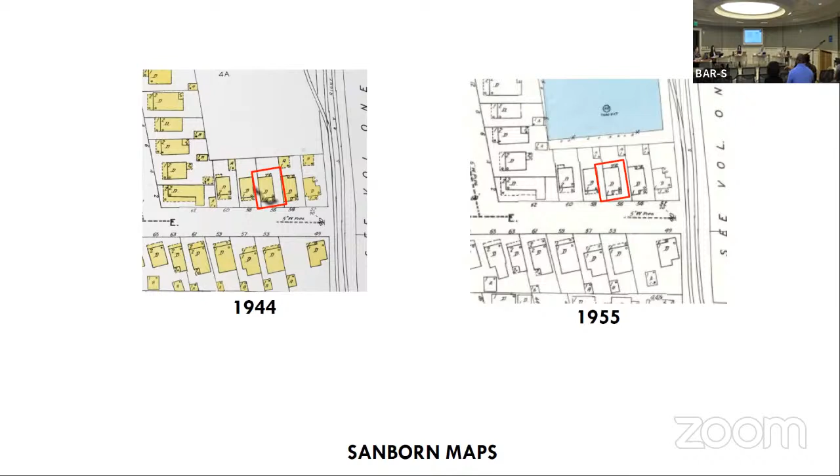Good afternoon, I'm LaShawn Key with Key Designs LLC. Going to present, we're requesting demo of 56 Congress Street. As you mentioned, it was built in the early 1920s.

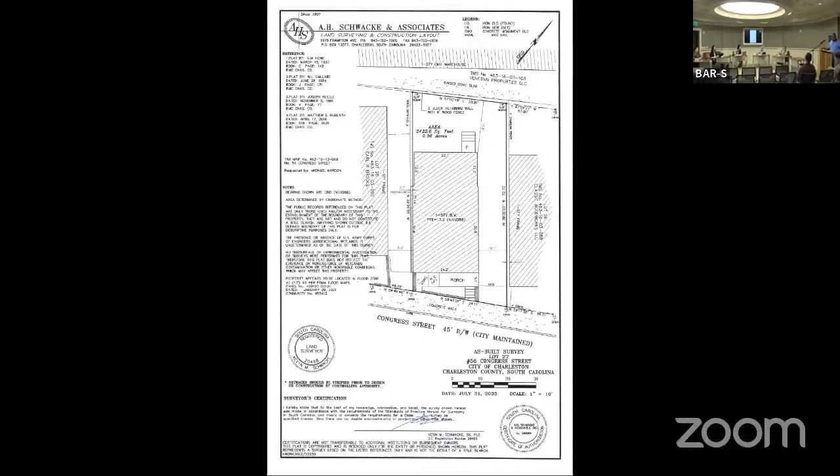This is the site survey, and I'm sorry, demolition drawing. Please go to the next slide. This is the survey for the property, and one thing I want to note that I failed to mention this morning is that the property actually sits across the property line by about 9 inches or so. That was also pointed out to us by the owner of the next door property, Ms. Alvina, who's here to speak about that later. Next slide, please.

We already seen the Sanborn maps. Next slide. This is an exterior shot from Congress Street, and a couple of things I'm going to talk about specifically to the historic demo purview is the fact that from this view, there's really nothing historic about the house that is still there. The metal roof that's in the Google images was taken off approximately 8 to 10 years ago. The wood siding is no longer there. It's brick veneer, and there's just really nothing there. There's also no survey card for this property, so we feel there's really not a good argument for it to remain here. There's nothing historical to tie it, to keep it.

Could be your next slide, please. There's also, this is the west facade, just brick. Next slide. And again, this is the rear property. A rear addition was put on, I believe approximately about 20 or so years ago. The rear is just really poor construction, actually not structurally sound. We do have a structural engineer's report detailing that.

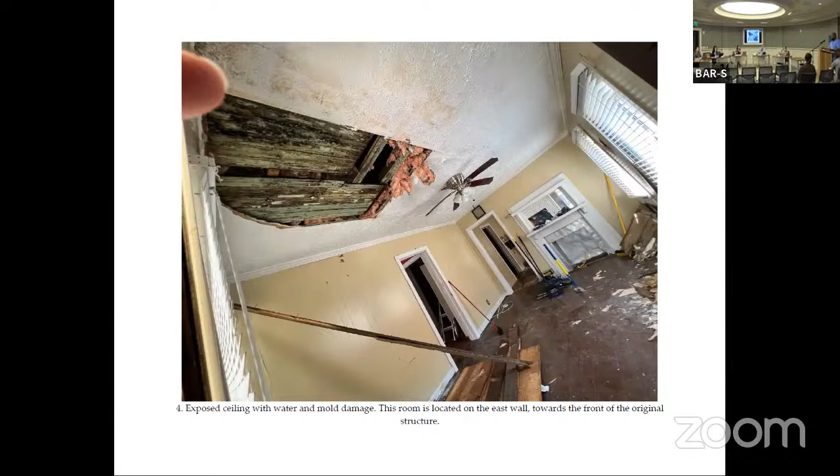Next slide, please. This is just some of the damage, water damage. Next slide. More water damage. Next slide. So these are just, you can periodically go through the slides.

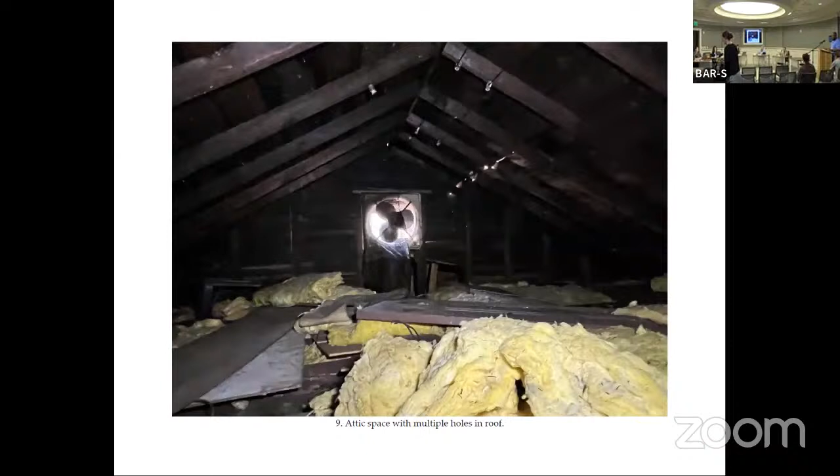Basically, the roof as it is now is very unserviceable. Water damage all in the interior of the house as well as the exterior. So we feel there's really no reason the house should remain, as well as our structural report, as well as a lack of historical information other than it being built in the 1920s.

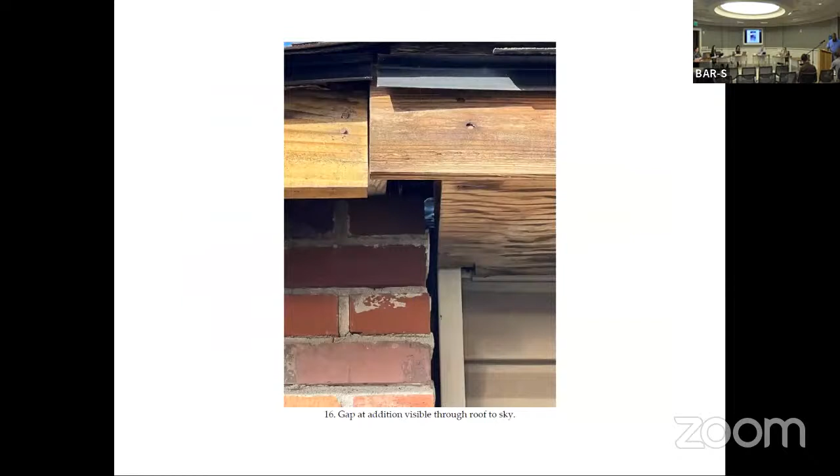We don't feel there's any historical value to this home, and feel we should be able to demo it and build something new. What Ms. Alvina here, her neighbor, wants to speak towards that a little bit.

Was the inspector that came to that house before this customer purchased the house. And he told me and another neighbor that the house was coming down. He had a drone over it, he had all kind of lights on it underneath it, I have his phone number and his card. We moved there next door in 1967, I was like 8, I'll be 64 soon.

Actually, that back was put on, not 9 years, 4 to 5 years ago. Mr. Harris, who just passed away, it was his sister, passed down to his sister, and he and his wife was living there. And they had just a regular handyman that hung around.

Had the original owner, when he bricked his house out, he was a brick mason. So the brick around his house, and it ended up on our property. Underneath that house, I would say the boards are probably 120 years old. From what I remember, there was white chips of paint on there, and he was bricking it up. So the boards wasn't even painted; it had already faded out. So the house probably got termites.

As far as the roof is concerned, I had the roof taken off, the tin roof, and his friend's son put that roof on about 4 years ago. And when the storm came, half of the shutters blew off. I watched them as they were putting it up, they were putting like one pack in each one. So the man came back and he redid it himself. And I have pictures.

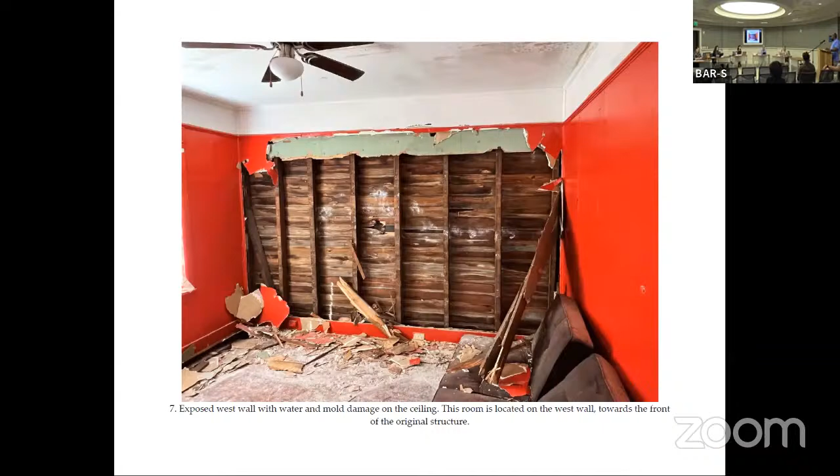All right, just real quick, one of those photos, I just wanted to make sure I was seeing that correctly. There's a photo you brought up with red walls. That's it, yeah. Is that siding we're seeing there on the other side of the studs? I am not 100% sure. The client sent me most of these pictures, and I haven't gotten in to confirm it. I do know that it could possibly be, I'm not sure, that would be the west facade. The east facade is a gypsum type of sheathing behind the boards that's ripped off, and if you go back a couple of pictures you can kind of see that. Right there, that's what the white is hanging down, and then on the side of that, that black paper is actually the brick right there. So it's a hodgepodge of construction all around the house.

Mr. Key, we move into public comment. Do we have anyone speaking to the public?

April Wood, Historic Charleston Foundation. HCF has reviewed the application for 56 Congress Street, and thank the applicant for reaching out in advance of the meeting. Although the house has been altered significantly over the years, the original form of the structure is readily apparent. Similar structures can be found next door and across the street. Removal of the structure would change the character of the street, and we recommend denial of the wholesale demolition of the house. We would not be opposed to the demolition of the brick veneer, the existing rear addition, and the other elements that have been added over the years. With proper treatment, this house could be returned to a building that contributes to the character of the block.

And Catherine Carroll with the Preservation Society of Charleston. The Preservation Society had the opportunity to visit the site this morning. I'd like to thank Mr. Key for answering our questions and walking us through. We are on the same page as Historic Charleston Foundation and not supporting this request. While we recognize this building has been altered, it retains its original form, which is highly characteristic of the rhythm of this section of Congress Street and important to preserve. I think it's also encouraging that the structural report provides specific, feasible repair recommendations outlining a clear path to rehabilitation. Given the level of alterations, to Historic Charleston Foundation's point, we feel there is room for creativity in approaching rehabilitation of this building. We would just ask that the board take this into consideration and request that these options may be explored.

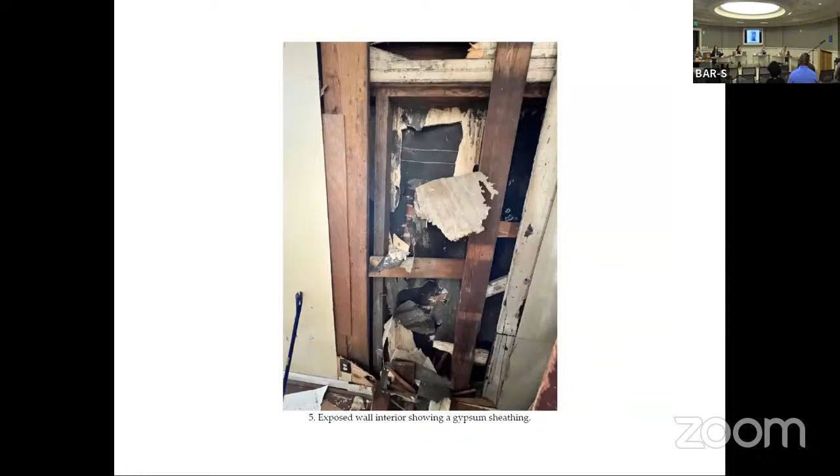Anyone else from the public? All right, Frank, you can give us these staff comments and recommendations, please.

Staff's observations: the adjacent property at 58 Congress, which has not been altered to the same extent as this property. The brick on the east facade of this property does not match that on the south or west. I think that was discussed this morning.

Staff comment: while the siding has been changed to brick, the overall form of the structure has been retained. An exploratory demo could determine if wood siding remains under the brick veneer and to what extent.

Staff recommends following the repairs mentioned in the structural report to restore the building.

Per our ordinance for this area, demolition refers to the removal of an entire structure or a substantial portion of a structure visible from the public right-of-way, or a substantial portion of features of a structure visible from the public right-of-way that define its historic architectural character. Staff believes that the demolition of this structure would compromise the character of the neighborhood and change the overall historic landscape of the area. So staff recommends against it.

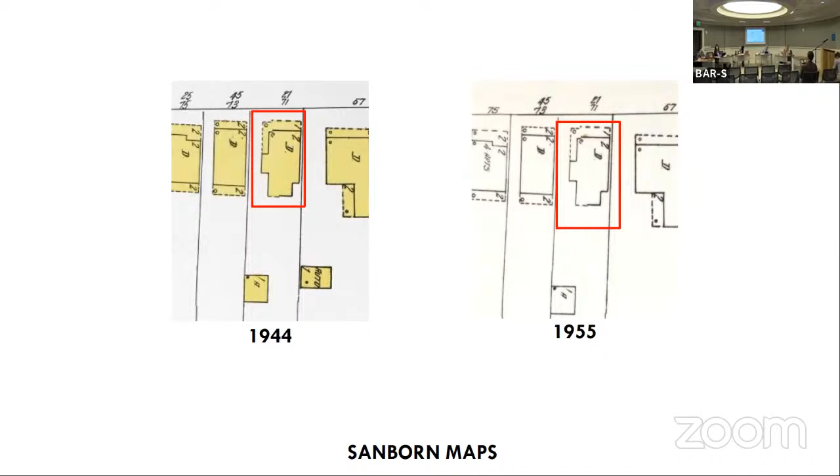I will turn it over to the applicant. Joseph Rubenstein with Dunright Construction presenting. We are proposing to do a renovation and addition to the rear of the property.

We're looking at, talking about that 1920 photo. Can you actually pull that back up? I didn't get a chance to see that real well. I can also send you a copy if you'd like it. That would be wonderful, thank you. So in that one, it still does look like it is the way it is now, if I'm not mistaken, as far as kind of fill.

The front porch studs, yeah, okay. All right, so that's what we were trying to figure out. We couldn't tell if that was original or not. I will apologize to you, Mr. Everly provided it to me a couple of days ago, and I didn't think to send it to you. No problem at all, I'm sure you're fine this morning. I apologize, we had a water line break at 8 a.m. this morning, so I was preoccupied.

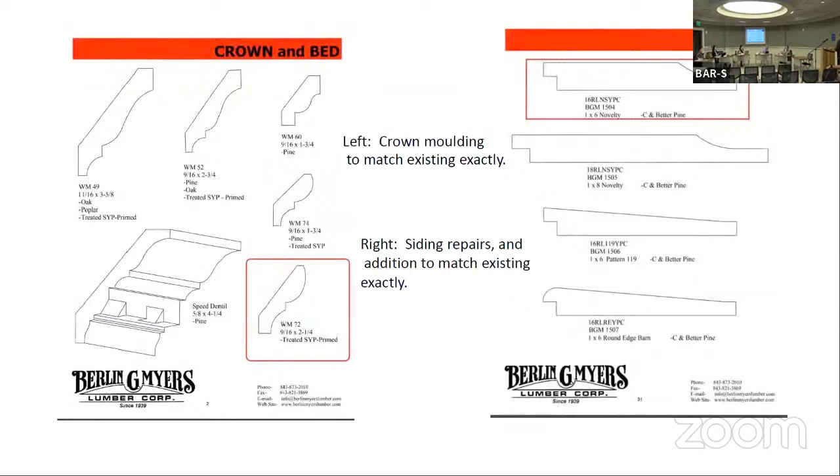You mentioned the front doors, they're not shown that way on the drawings, right? They're showing the existing. No, I had some information there on doors. There was a cut sheet for a one-light-over-one-panel door, but on the drawings themselves, I think it shows the existing doors to remain. I just want to make sure I'm clear on that. And I overlooked that.

Correct, yes ma'am, just the customer asked for it to be updated. Something to start on your end, we could look at. We would like to do it regardless, just because it's a renovation, but we need to stay a little more in line. That's something we can discuss for sure.

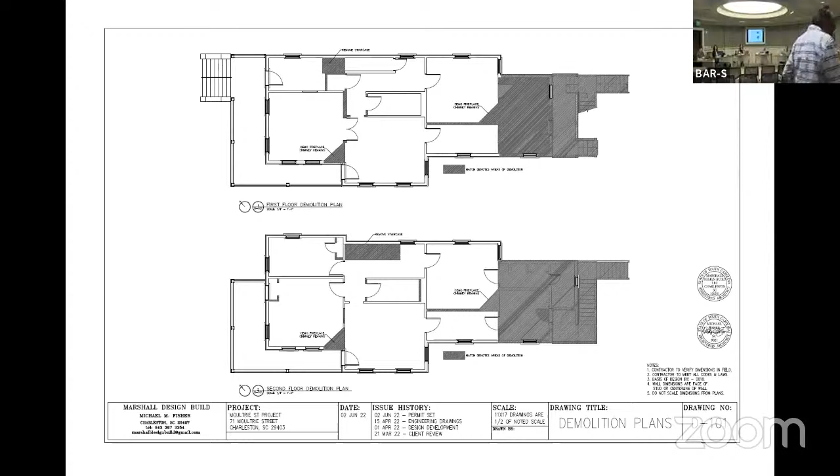Thank you very much. My name is Kevin Eberly. I live around the corner on President Street. I'm an officer with the President Community Hampton Park Terrace Neighborhood Association as well, although the owner and applicant never approached us to discuss the matter. I'm wholesale opposed to the application on various components.

First, for the windows. I'm not, despite what people may say, a crazy person, and would not be opposed to selective repair and removal of some of the sashes. But the plans I looked at weren't clear about exactly what was even being proposed, which windows are to stay, which are to go. I would not oppose having staff meet with the applicant to do a selective removal, but hopefully many of those windows could be repaired. From the ground this morning, many of them looked like they were possibly repairable.

At the adjacent house, 67 Moultrie, several years ago when it was being restored, the owner had begun actual removal of the windows on the west and south side of that building. Dennis, the former city architect, was contacted and put a stop work order on the windows, which are also 2/2. He heard the same argument about bad condition, and those windows all had to be removed on the west and south side and replaced with exact matched custom windows. The ones still intact on the north and east sides were ordered to be preserved.

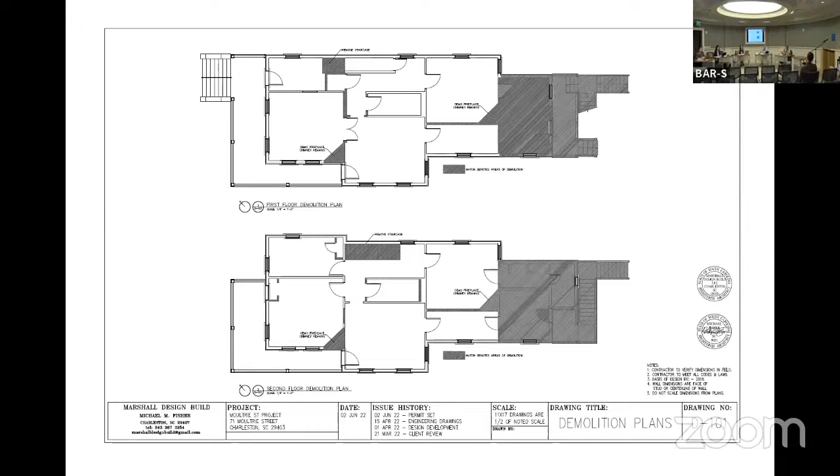Staff observations: we believe the rear porch and stair were added approximately 1970 to 1981. The existing rear addition is minimally visible from the street, but as we found this morning, it is visible from Rutledge and Union Street. Staff comments: while the enclosed portion of the house is original, staff would not object to the rear porch or stair being removed or added to.

Frankie, Ms. Rubenstein, did you want to respond to anything raised in the public comment and city staff comments and recommendations?

I apologize if there was a little lack of information on the windows, but yes, we definitely want to preserve the ones that we can. I do think there's about 6 of them that need to be replaced with ones like the rest, so that is for sure. As far as reading your comments and hearing that, it sounds to me like there are bigger issues.

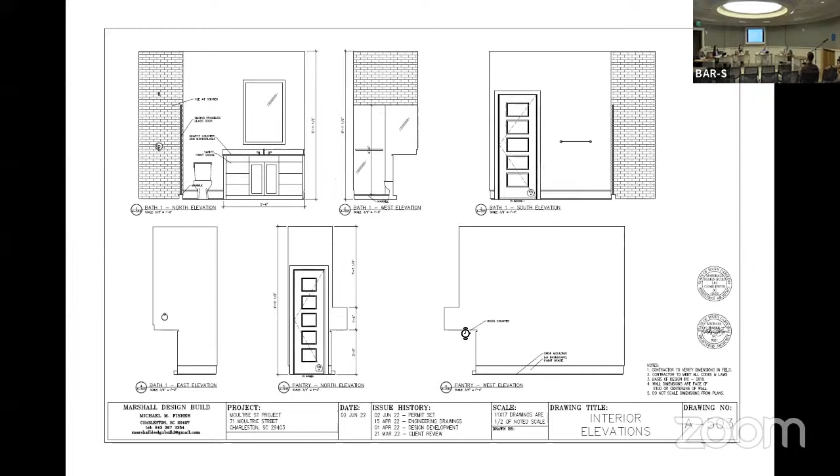Question for staff: that is the front porch. Is there any demolition considered? Any extension? Yeah, it's a little bit of a gray area. Technically, we would be demolishing the form of the roof over the front door. I guess it would be up to all of you to decide if you think that form is important to retain.

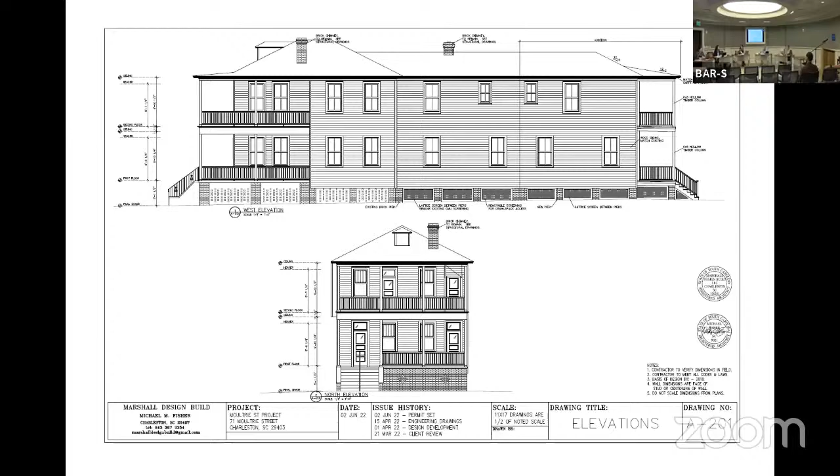Make sure that I'm on the same page with everybody else here and just explain to the applicant. I think this is the parent's understanding that that is not a previous addition. Right, but this is actually part of the original plan. Correct, and just support that. And then in terms of visibility, it's not easy to see from Rutledge because of trees, but trees don't count.

Front doors are in good condition and historic, if not original. And it's also sad that the fireplaces are going away.

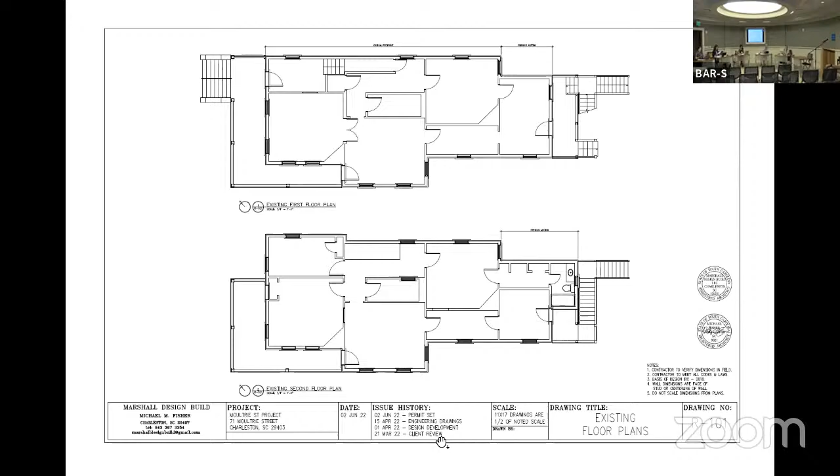So ultimately what the homeowner is trying to achieve here is they want to enclose what was converted into a deck above a kitchen area. I'm Paul, I'm the designer. I might clarify, I think that the historic piazza classification for this area is probably inaccurate. The kitchen area that resides underneath it has a hydrostop roof that was added, and this porch structure appears to have been added at the time the kitchen was. It's not original to the house itself, that portion.

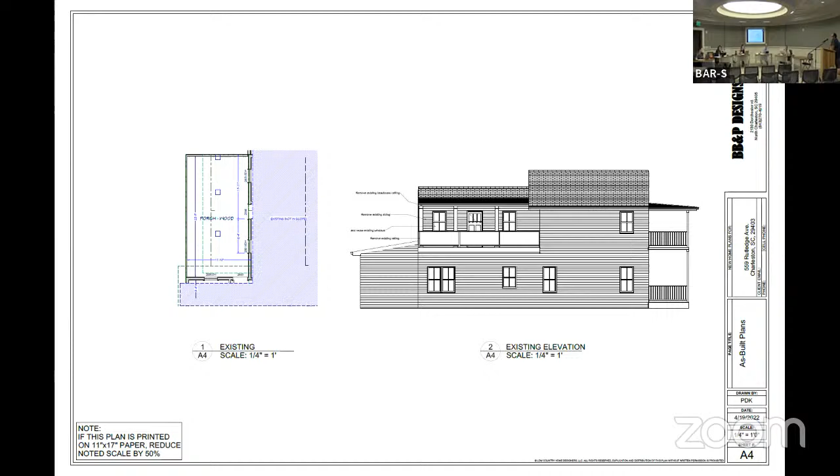Randy, do you have anything? All we have is the Sanborn maps that show a set-in porch. Yeah, that's not the kitchen. Well, that's the two-story porch. Yeah, it was. At one point in time there was a two-story porch on the back of the structure, and it was added, I don't know when it was done. That's what I'm trying to say. No, you looked at it this morning, right? You saw the bump out for where that kitchen was added on the lower level, so they closed in and extended.

So the roof is original, that roof line over the back addition, that's the original roof line. That's why it doesn't go all the way over the porch. I think there's a picture on one of the pages that I gave you in the drawings that shows the porch from the standing on it view.

You can see the hydrostop deck and railings, added from the kitchen underneath. That roof line above may be the original roofline.

Any other questions? Anyone speaking for the public?

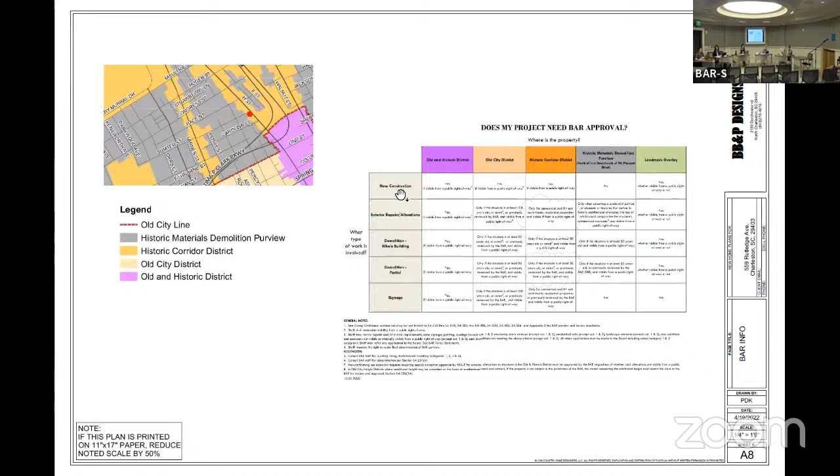Anyone else speaking from the public? If you'll give us the staff comments and recommendations, please. Staff's only comment was that this was the only remaining example of that feature, and we believe it should be retained. Therefore we're recommending denial. Mr. Kime, did you want to respond or clarify anything raised in the staff comments?

No, I think it's a pretty cut and dry situation in general. I'm sure you see about 800 designers and contractors tasked by homeowners to achieve an objective that's important to them. I think it's minimally visible from the street, and the character's been pretty drastically altered from what the original feel of a two-story piazza is for Charleston. But...

Okay, public comment and the applicant's presentation are now closed. We'll move into board discussion and a vote.

Yes, there's no question it's been changed a lot of times. Looking at the photographs, it's a little hard to tell, because that's all we have. I think the roof of the existing porch is original, the columns are probably new, though that roof form and line of columns — even the columns have been replaced. That form and the roof, and the ceiling, are probably original.

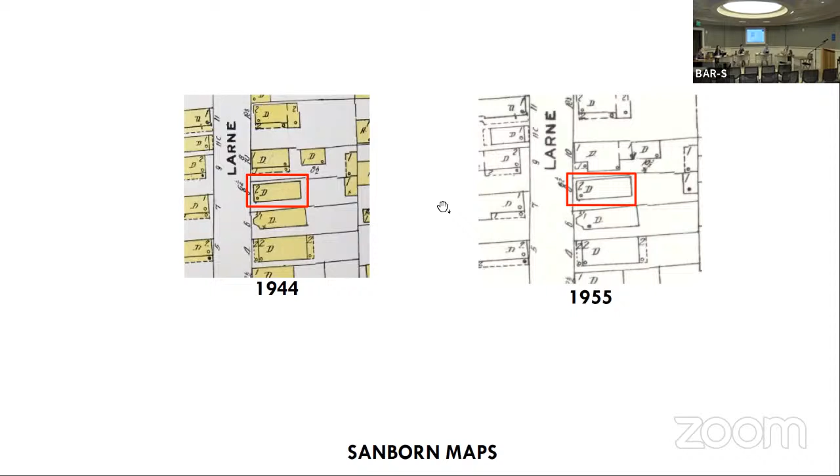I've got the applicant's previous presentation here. If you want to come up, I'm not sure if you want to discuss the previous presentation, or we do have some photos of the existing site I can pull up. That's fine, I just had a deadline to get everything in, so I missed it.

Good afternoon, my name is Marty Gunner, I'm the owner of 8 Larne Street. I want to first say thank you for your time this afternoon, and apologize for my miscommunication and lack of knowledge of the processes, once we started finding damage inside the home as we were doing the work.

The first item I would like to talk about is the roofing portion of the project. As we were going through, we found a lot of damage in the roof, and along the entire perimeter we had to cut the roof back 18 to 24 inches and replace all of the roof sheeting, 18 to 20 inches all the way around the perimeter on the outside edges due to rot.

What we were wanting to replace it with is a standing seam metal roof, black in color. I much would have rather gone ahead and done a silicone coating over the roof if we could have patched it that way. But with the amount of damage we're finding, and vines growing up through the panels allowing water in, we decided to mitigate the damage as quickly as possible, shut it off, and put ice and water, high temp, on top of the roof.

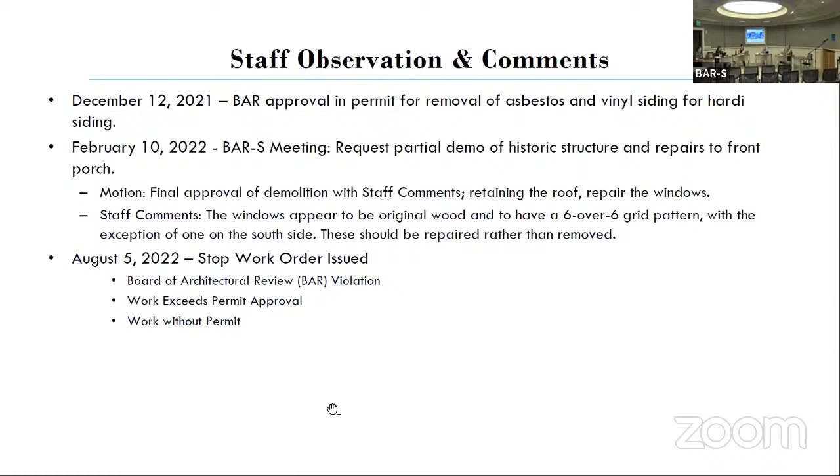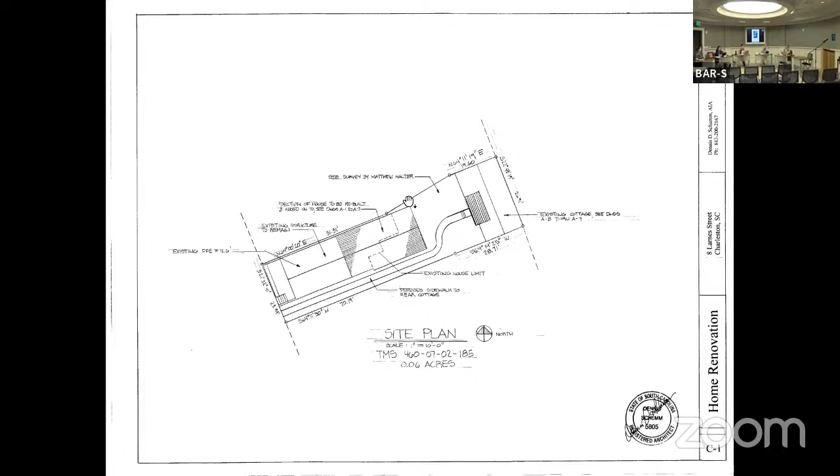Do you think looking at the original photos, the windows on the front, I don't know about the side, the windows on the front, I think, are in the photographs.

Two things that happened at once. The roof - we could just say define what should be a standing seam metal roof with a hand-crimped ridge. So that's the chimney.

Gotta make a motion for voting. Staff comments and board comments. Shutters are to be replaced, and the original window sizes and locations are to be restored, with original 6/6 windows.

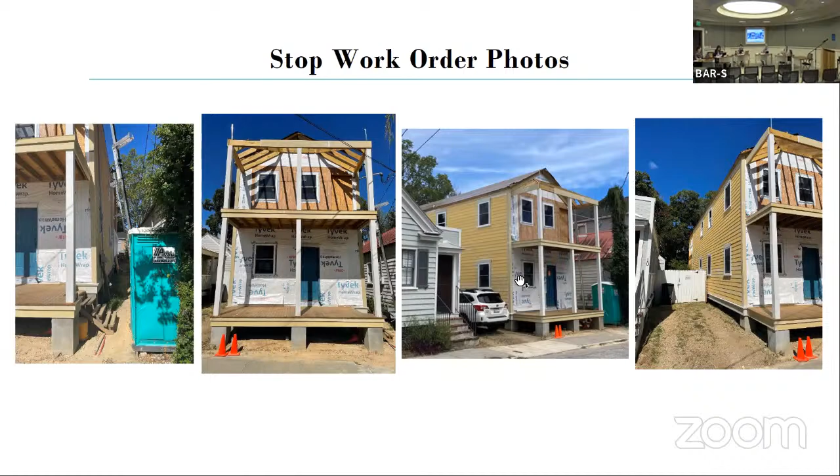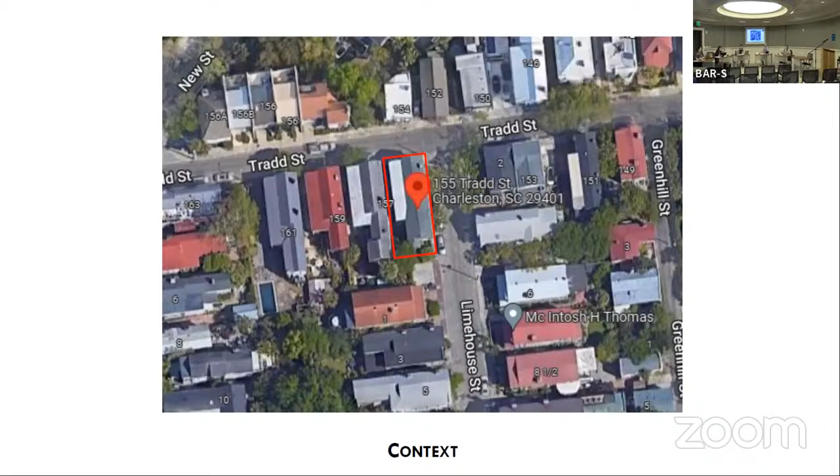Tradd is requesting conceptual approval for a partial enclosure at the rear of the piazza. It is a circa 1900 structure in the old and historic district, located at the corner of Tradd and Limehouse. Existing site photo, some context. Here's the house on the Sanborn map.

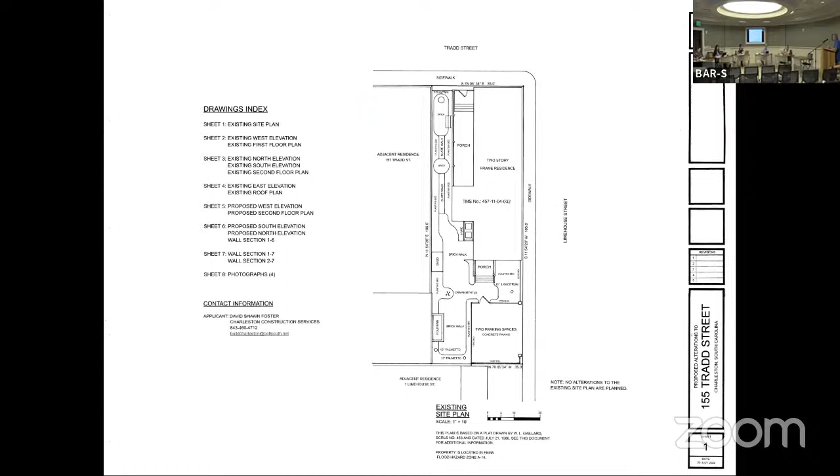David Foster, Charleston Construction Services. We were proposing to close part of the piazza over the sitting room on the right-hand side of the property. This slide shows existing conditions - that's the sitting room below the area we're trying to do this enclosure for, a bathroom and laundry room.

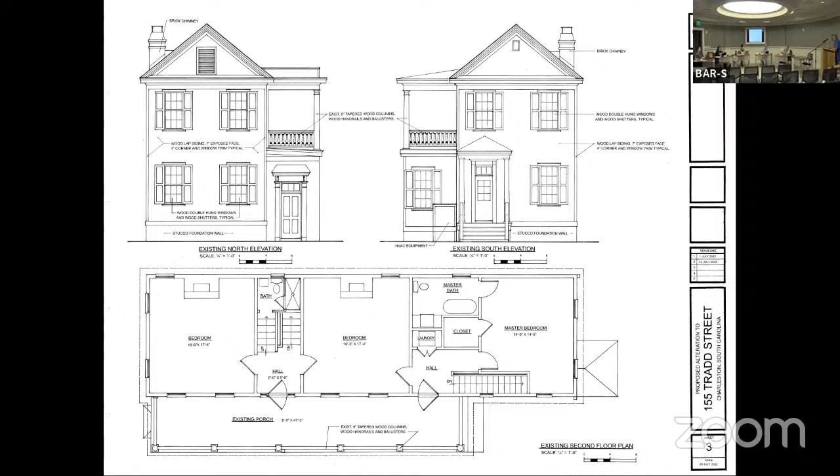Next slide - this is the front elevation. Opposite side of the piazza. There's a roof section showing the roof over the piazza. That is the proposed addition over the sitting room in the back half of the piazza - the laundry room, bathroom.

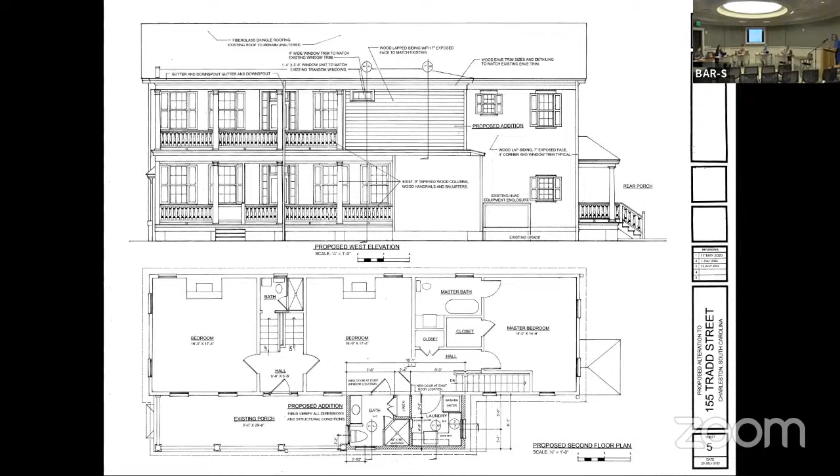Do we have anyone speaking from the public? April Wood, Historic Charleston Foundation, I see has reviewed the application. Piazzas are a building feature unique to and closely tied to the character of the city that should be preserved. Happy to hear that the second story piazza is particularly special, as it is still completely intact with full visibility.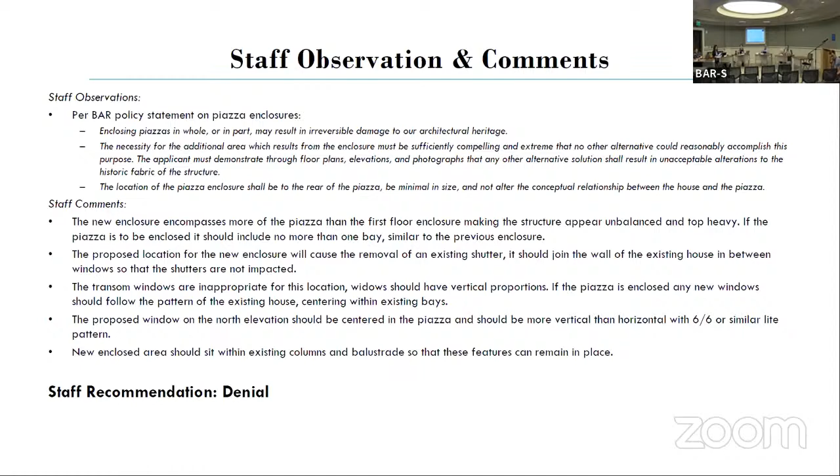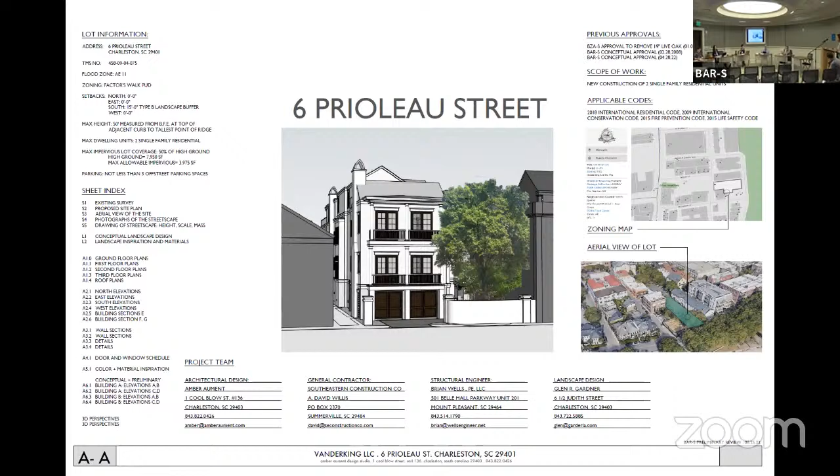So again, it's a nearly fully paved parking lot in its existing state. The proposal is for 2 detached, single-family residences. This is a reminder of the context.

We have smooth stucco with cast stone details, and then at 5 Mid-Atlantic Wharf, smooth stucco. We've got wood columns, wood railing, some metal louvers, metal railing—sort of a mixed bag in there. But as we talk about the materials and elevations, I just want to make a note.

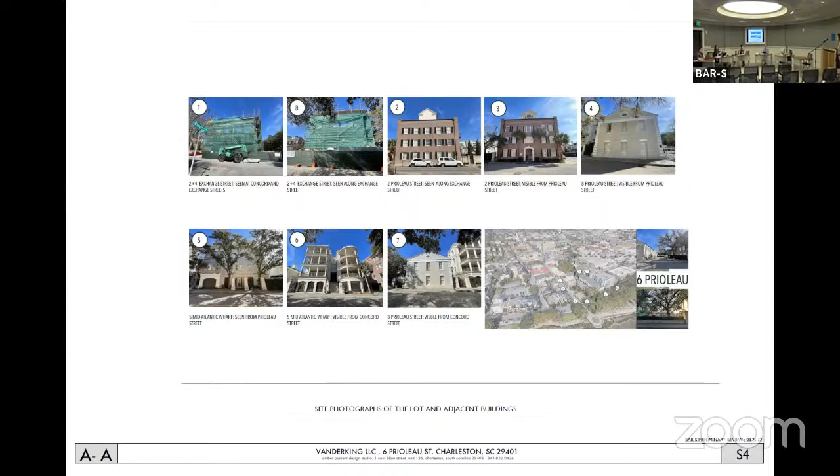So here are the updated street elevations, our line drawings, and here is the landscape rendering. As a reminder, the south setback is a 15-foot Type B landscape buffer. This is highly prescriptive in the size, species, and number of plantings.

What is present here, what I think is really obvious, is how lush that southern border is going to be, and what an asset it will be to the neighbors to the south. You can also see the heightened processional experience for guests entering the interior courtyards, and through hardscape, the loggia that will be underneath each structure at the ground floor.

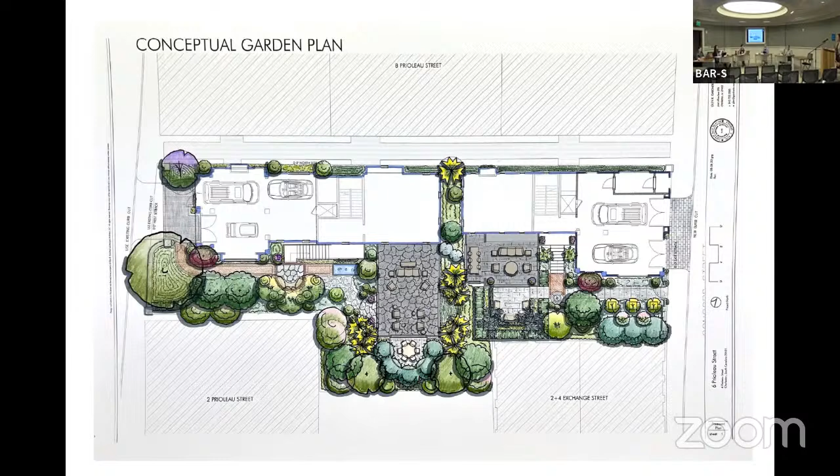I'll note a couple of things we implemented in terms of staff and board comments. We've streamlined the projections along the north side, and we recessed the garage bays by 2 feet—particularly important on Concord.

In an effort to get this right, we changed those carriage doors to the outswing. But do note that this is well within the property, off of the driveway.

Also, we introduced the complexity of the elevated slab in the third floor portion of each building. In an effort to keep this squarely within IRC code compliance, we designed an elevated crawl space under those third floor areas, to eliminate that elevated slab story so we can maintain 3 heated square footage stories above. In section, the result...

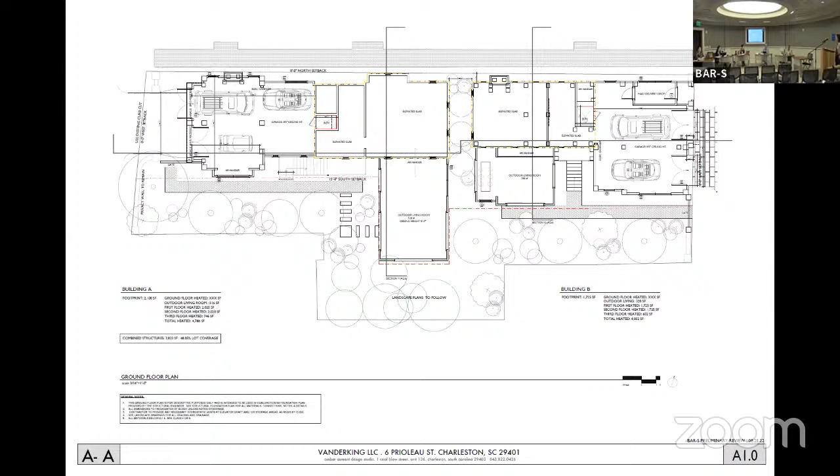That's what we worked out with the building inspectors. We can probably move ahead to the first elevation. Okay.

Per staff's request, we lowered our ground floor. We are now 8 feet from slab, and this is not only per the board's request, but also more aligned with being 2 feet above freeboard, FEMA compliant.

In this component of the building, you've got the elevated slab. We'll have to have the presence of flood vents there, but these lower 2-story portions of the building will have some louver screening, since they will be occupied by the garage underneath.

So both street sides will have operable garages underneath. In terms of materials, staff had requested a change in material at the ground. Masonry at the ground floor, still limestone, smooth stucco finish there, and then a cast stone band board around the perimeter to differentiate, or terminate, the transition to siding above.

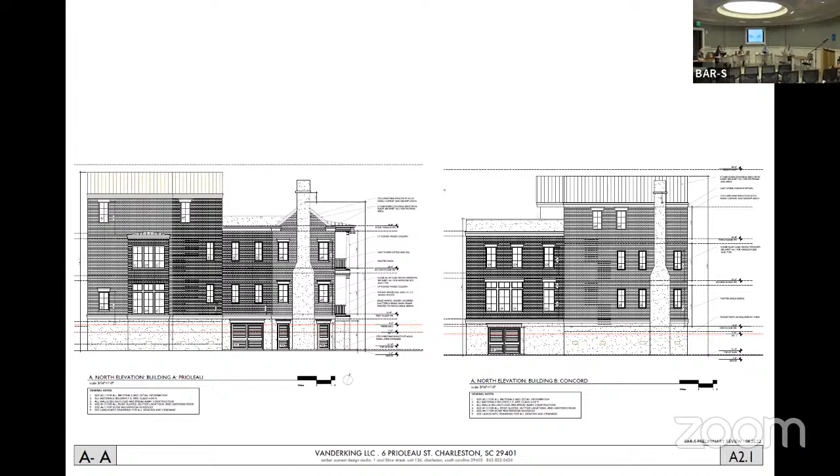And then along the south, I'm sorry, can you go back? Board requested we eliminate Juliet balconies along that street front as well. So in the south elevation, next slide, we removed them. Previously, they were sort of along these hyphens.

Now, because we've lowered those three-story portions of the building, this finished floor is 2 feet lower, so there was no need to enter from the ground floor anymore. We're now entering the first floor. It's a little more celebrated, ceremonial, and grander.

You've got about 2 minutes left. Okay, great. So then we've got the Prioleau streetscape. Really no change there aside from the recessed garage doors. Overall, I think you'll find there's a simplification of ornamentation, so there's more consistency among the composition.

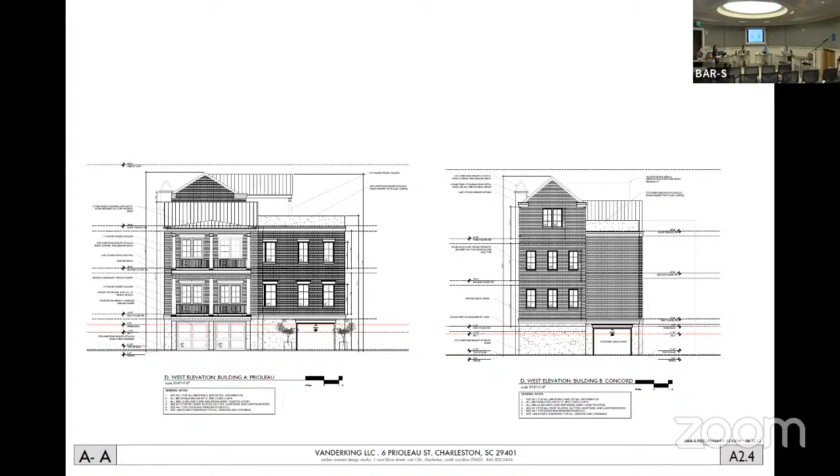So the Gaillard is a great example of a smooth stucco finish. We're looking for that sort of medium acid etch. The cast stone details - this image shows the level of brick tooth that we're after. This won't be a painted wire cut; it'll be a nice clean brick, have a handmade feel.

Copper lanterns at the entry. The lantern with the yoke is proposed for the loggias underneath. And then this bottom row, this is the color palette that we're after - some warm whites, bronze windows, bronze roof. And then this last image, that entry sequence will have no rail, pair of wood doors.

That will conclude the progress to date. I'm sure you'll have questions about the elevated slab though. Thank you.

Questions for the applicant? Do you know what kind of windows you're using? Yeah, so we've been looking mostly at Kolbe. Nonetheless, despite vendor preference, it will be aluminum clad, wood interior, but hopefully with the 5/8 inch mullion.

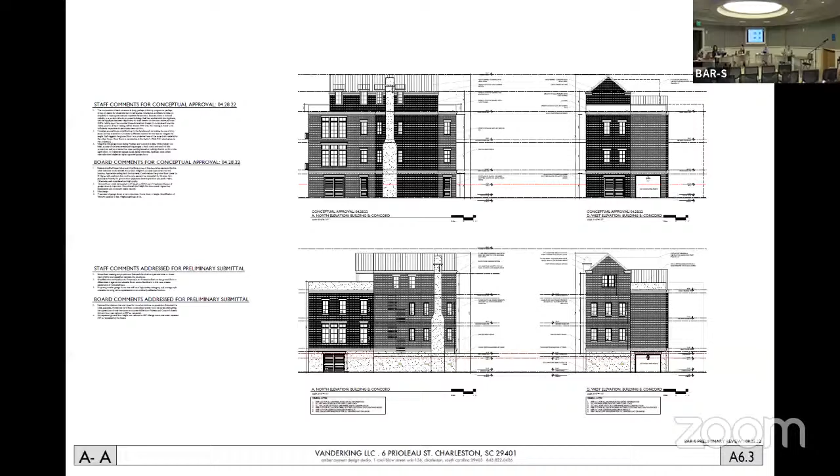We have an email from Wendy Bartlett, our next door neighbor, Scott Corbon, has provided us. Yeah.

Okay, now Frank, you can give us city staff comments. Staff has worked with the applicant and notes the refinements since conceptual. They include better proportioned columns at Prioleau Street, the introduction of a differentiated base material change for the separated gable end, simplification of exterior trim and elements, the removal of projecting bays, which also help bring unity to the north and south facade, and the enhanced entries are perhaps more important since the entries are off-street. The applicant has addressed board and staff concerns from the conceptual review. Therefore, staff recommendation is for preliminary approval.

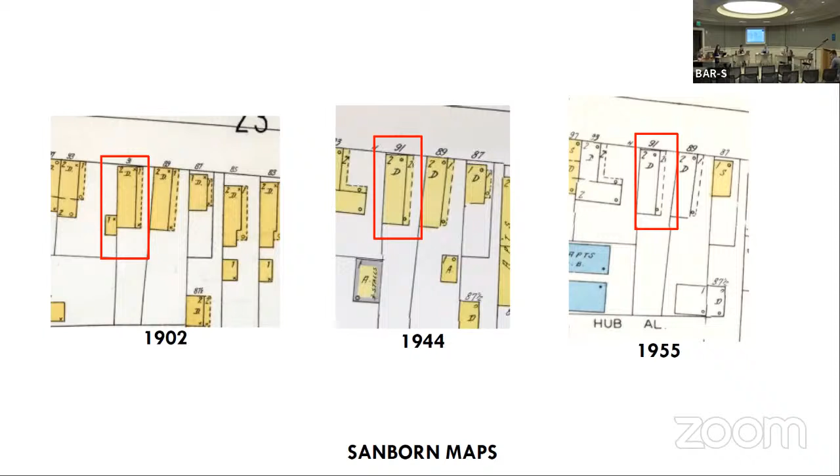We'll turn it over to the applicant. Good evening, I'm Sean McLaughlin, representing the ownership group. Thank you to staff for all the feedback along the way, I hope we addressed that to make support for the application.

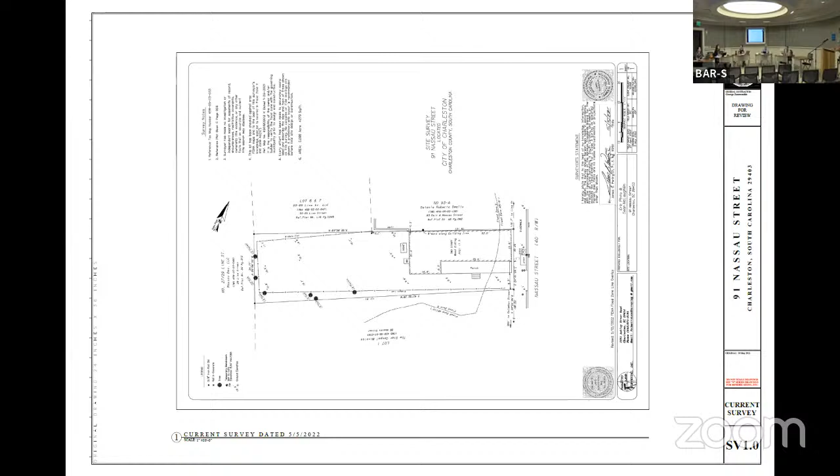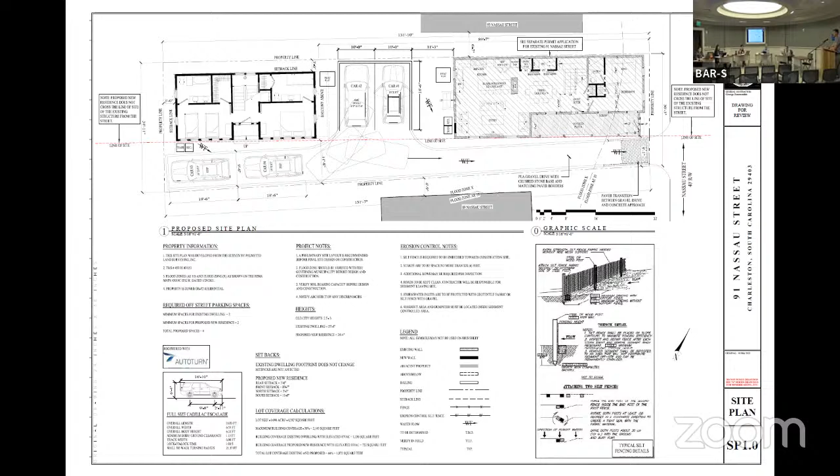So, next slide. Any questions on that? As you can see, the wonderful project in the front and then the back project, again trying to orient around some of the field. There's the elevations that were specifically called out last time - we addressed those appropriately, subordinate to the front house.

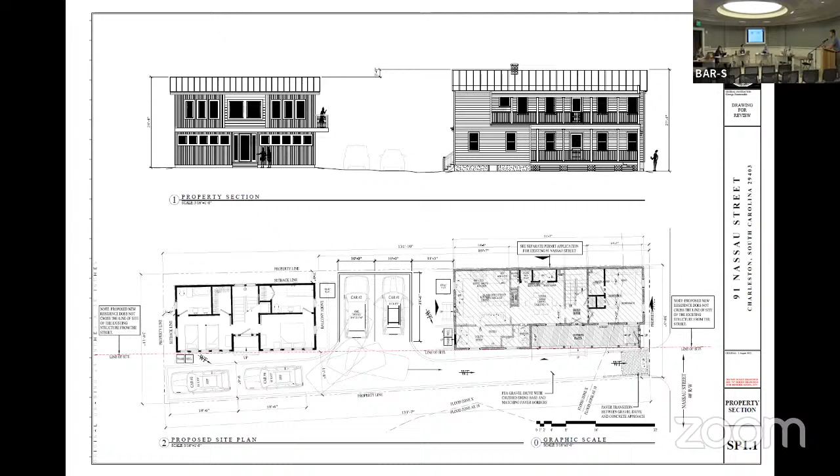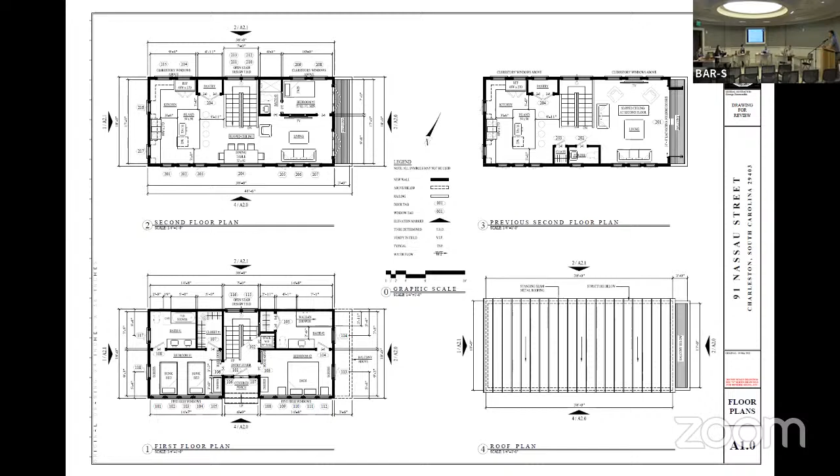Next slide. So, it's the floor plan, any questions? Next slide please - elevations, again ensuring it's subordinate to the front house. Next slide. Once again, subordinate.

Next slide please. All right, thank you very much. Just know that I'm from the area, lived here my whole life, so I'm very focused on preserving the integrity of the neighborhoods and historic values. So thank you all.

Mr. Parker, do board members have any questions for the applicant? Just walk us through the materials you're proposing.

Yeah, so the corrugated siding - I can't really tell the gauge of it or anything specific of that nature, but the corrugated siding has a really useful lifespan. If I still own it, or the next owners, hopefully they don't have to come in here and ask for modifications because we invested in the useful life of the structure. It's generally a pretty easy application. I guess the windows would be something we might discuss as well.

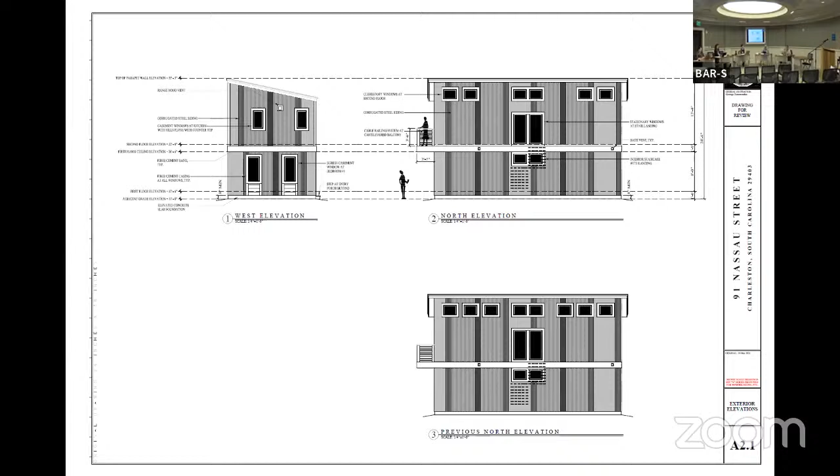Is there anyone else speaking from the public? Frank, you'll have the opportunity to respond after the city staff comments and recommendations. Frank, you can provide those.

Staff observed that while this is in line behind, the elements of this proposed building are very visible from the street. The proposed building should be more subordinate to the historic structure - another roof type, like a gable, might help achieve this. The architectural style, while differentiated from the historic structure, should be compatible and complementary, so we're recommending further study. Corrugated steel siding is not an appropriate material for this location. Balconies are atypical of the area. Casement windows on the west elevation should be centered within the facade. Staff recommendation is conceptual approval for height, scale, and mass, and general architectural direction.

Thank you, Frankie. Mr. McLaughlin, did you want to respond to anything raised in the public comment or city staff comments and recommendations? Oh yeah, sorry about that - you can rebroadcast them to...

Okay, cool. So look, I spent a lot of time in the neighborhood. I spent a lot of time with the Eastside Community Council, attended their meetings, spent time with the neighboring church.

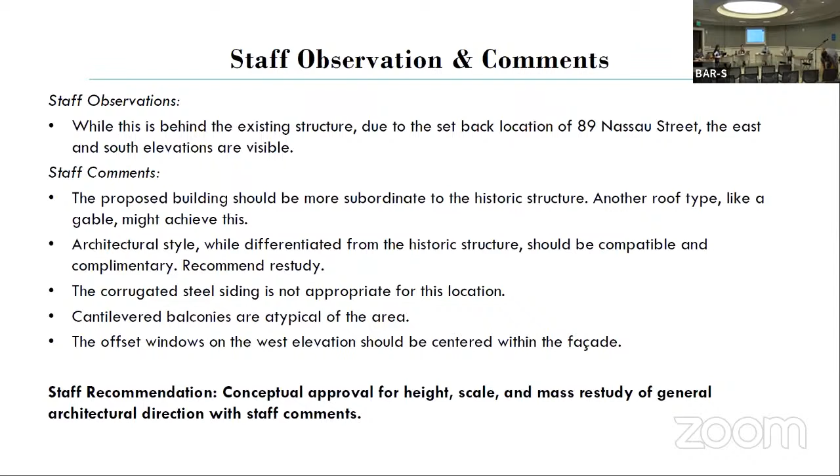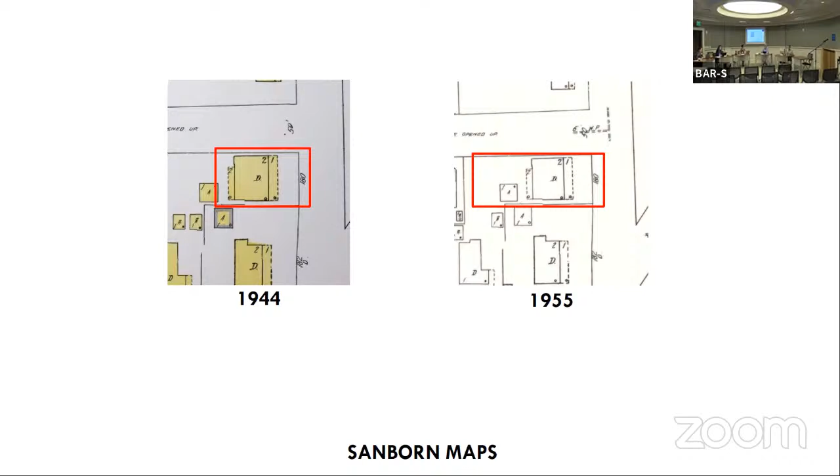I'm Ross Ritchie with Loyal Architects. For the design, it's a carport and loggia, and there's an existing gate and opening in the masonry wall on the front. That's kind of where the existing car is parked, so for siting this structure, we really looked at the garden, the main house, and how it addresses the current gate. It's set back from the street, really trying to integrate the garden aspect of the property. We recently got approval and variance to site it.

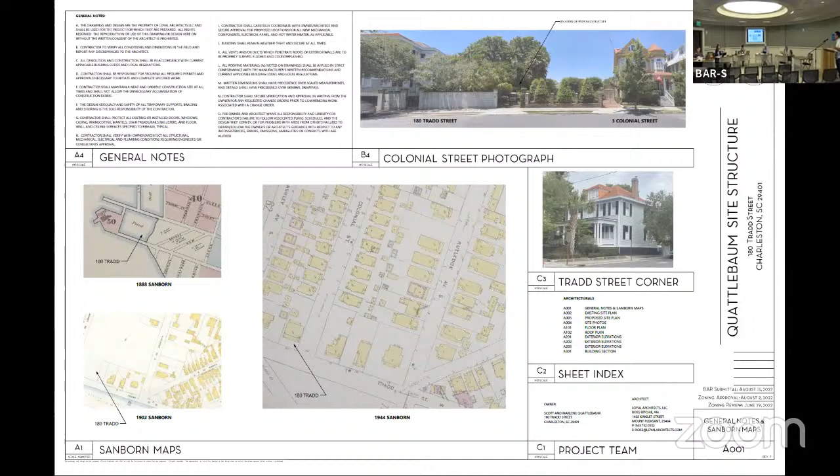That's kind of the existing gate parking area in the back, and garden, with a pretty high masonry wall in the back. The piers would be aligned with the piers of the gate on both sides, and we're trying to keep the height to the minimum going through there.

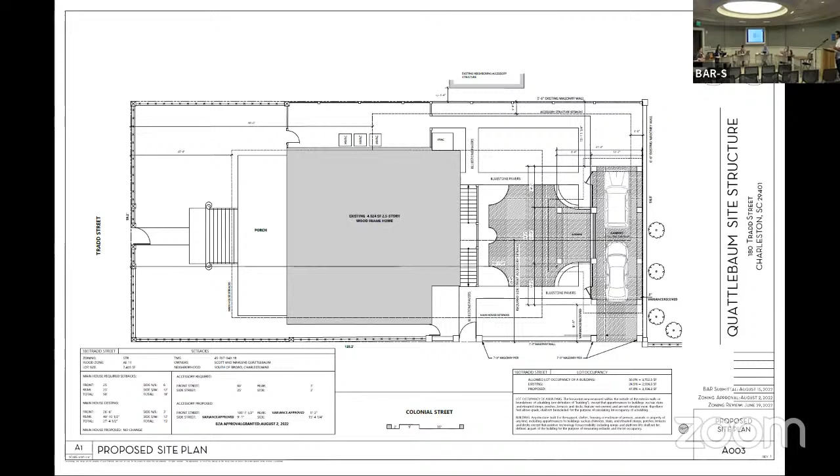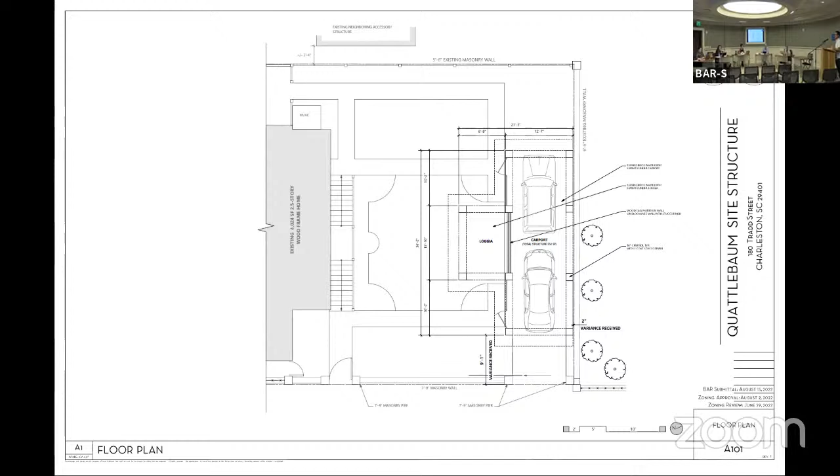So it's all masonry piers, stucco, open. The only wall separates that parking area from the loggia, the part of the structure that addresses the garden, and the existing entrance gate. This is the site plan showing the structure there - there's a clay tile roof, a flat clay tile roof, matching the main house.

Let's go to the next one. As it's really close to the property line, we have it parapet with stucco on the property line side, with the clay tile sitting back. The clay tile will allow us, with some heavier rafters, to still carry the weight of the clay tile.

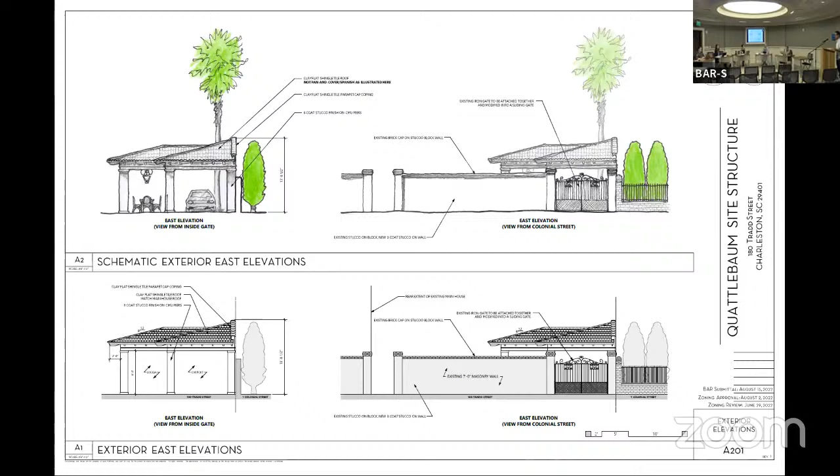There's a view from the gate, and beyond the gate - let's go to the next one - this is from the garden view, the view from the Colonial Street garden. We've met with the neighbors and received approval from them, so it's in the BAR design.

On that side is just a recessed panel of the stucco with the clay tile, the gap on that side - trying to keep it down as much as possible, still allowing privacy, but not being such a big wall. We already have a lot of larger trees there creating some privacy, and it's also not allowing any water to go on that side.

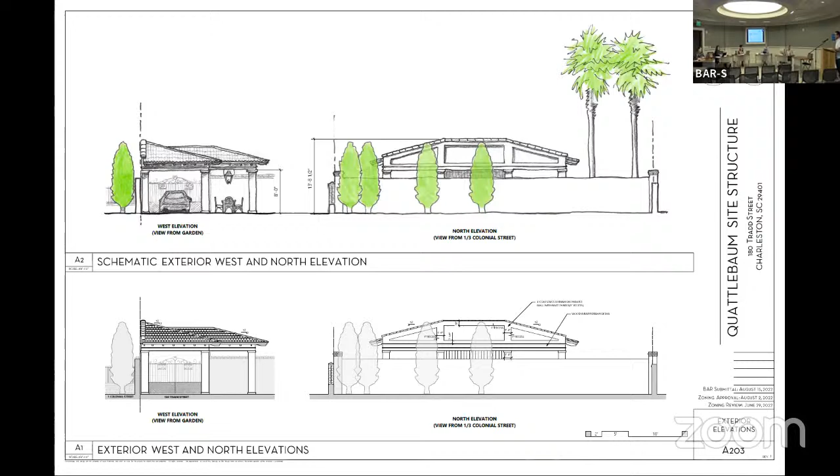The gable and the wall - is that stucco on frame? It'll have a drainage mat and the proper way to do it.

Thank you, Mr. Ritchie. Is there anyone speaking from the public?

There was one written note. Now it's broken.

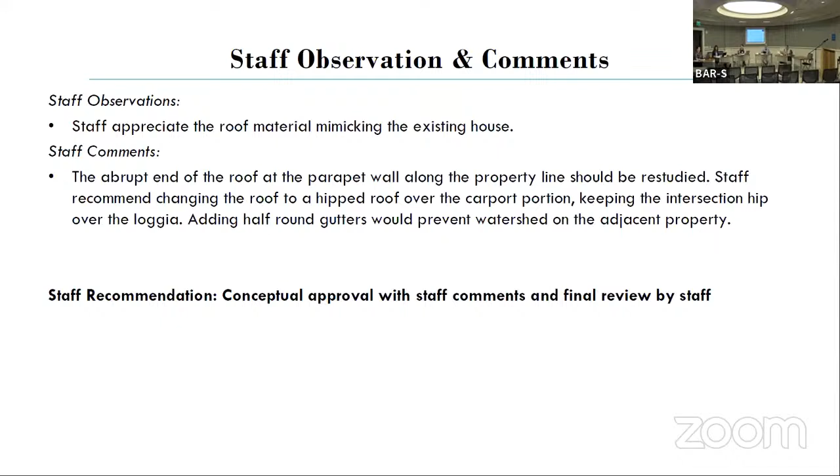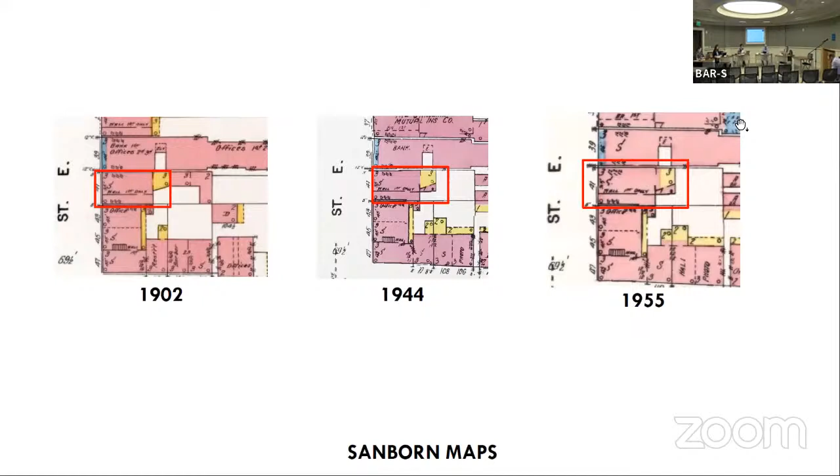Turn it over to the applicant. I'm Crummy with Synchronicity Architects, and we are requesting approval.

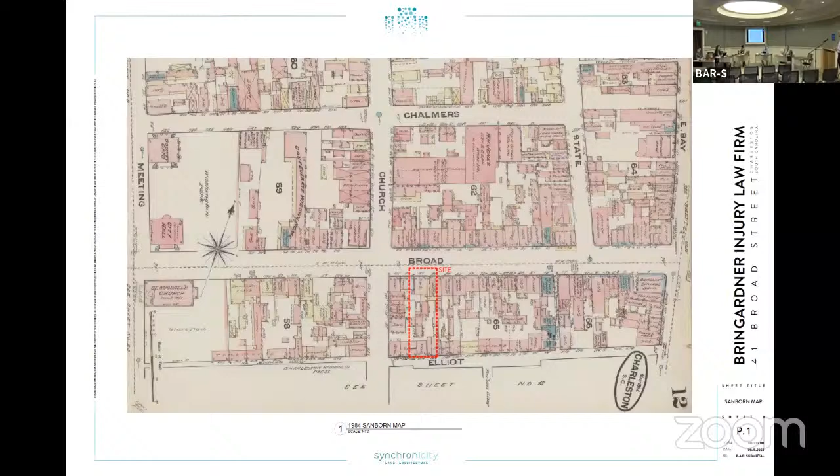We're requesting approval for the window and the existing door on the Broad Street elevation. We believe that the reestablishment of the transom would allow greater depth of light into that first floor, and there are storefronts on Broad Street as well, namely 40 Broad, 36 Broad.

And 15 Broad. We're also requesting the replacement of a door slab on the Elliot Street elevation, in the rear on the second story. We'd like to replace the existing door slab with a full light.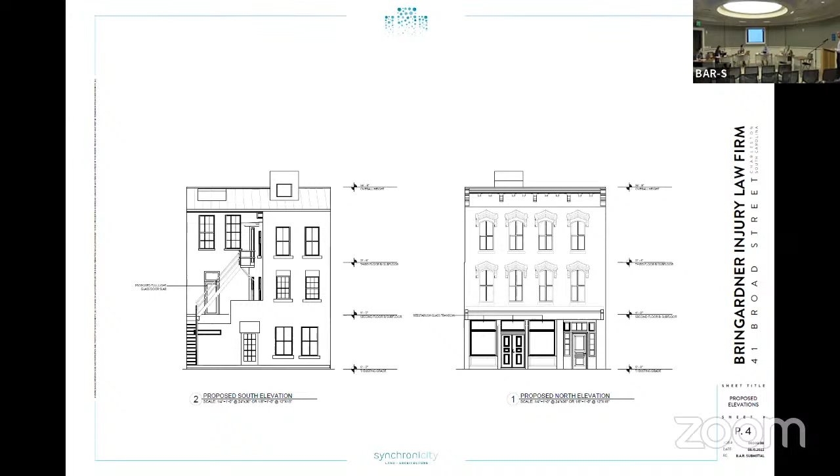Board members have any questions for this? Curious about the existing front doors, what is your recommendation? I'm curious about that really heavy structure between the transom and the door, where the door is lower than the bottom of the transom, you know what I mean? Yes, we just believe it's like a wood panel, and we're trying to replace it and turn it out with a glass panel.

Any other questions for the applicant? It's just going to be a glass panel with wood trim.

All right, do we have any public comment? All right, so give us any staff comments and recommendations, please.

Staff recommends breaking the horizontal pattern of the windows similar to the present image of 41 Broad. Other than that, we are recommending conceptual approval with final review by staff. The applicant to respond to anything raised with that comment? Yeah, we'd be happy to work with that and try to work with staff on the next movement.

Applicant's presentation is now closed. We'll move into board discussion and vote.

Get the transoms back, just that one back, and the middle transom is taller than the other two. Any other precedent you would look at, those would all line up, the transom bars would all line up. For some reason that panel is back here on the old survey card. The survey card didn't have that same way. It was already right, but the bar is lower than the other.

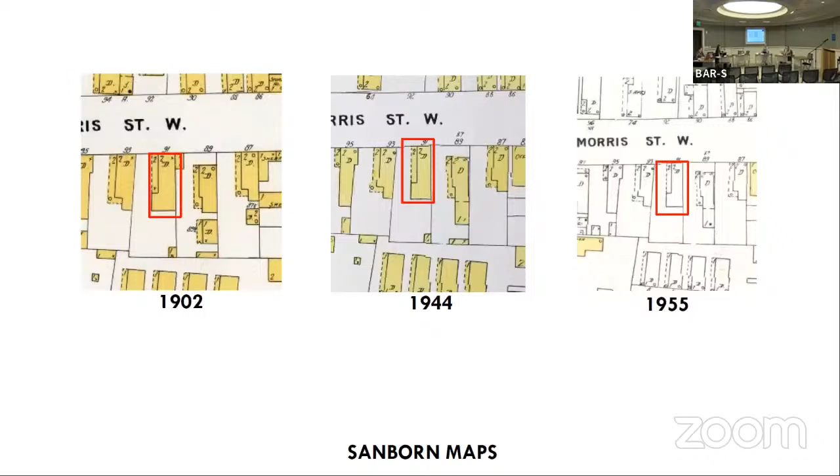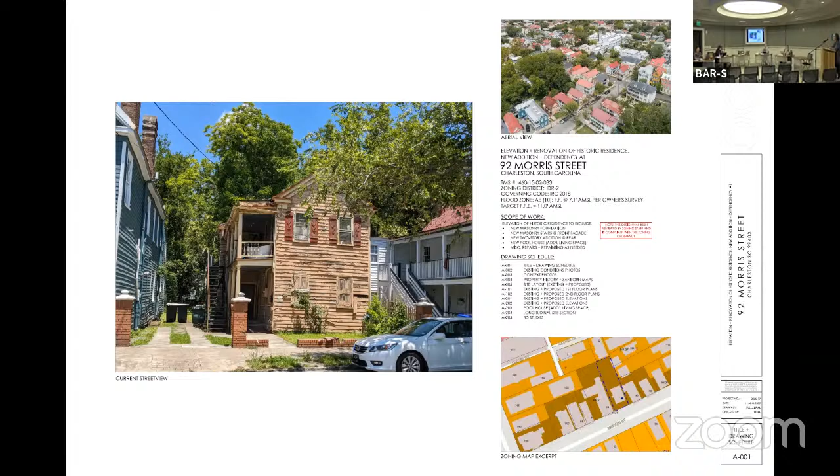Board members, Erin Lanier with Julia Land Architects, on behalf of the new owner of 92 Morris Street. I'll just clarify, we're elevating and renovating the existing structure, adding a rear addition. I think I had typed up that slide before we realized the description on the application was truncated, and we fixed it on the agenda but not on the slide. Gotcha, okay, well I'll go ahead to the next slide please.

As you can see, this is a two-story wood frame single house purchased by our client earlier this year with the goal of restoring it for use as his personal residence. The building is set back from the street, it's right on the ground, and it is in really poor shape due to years of neglect. It was most recently a duplex, and previously included a large two-story rear addition that was ordered down by the chief building official in 2018. The photos in the bottom left show the current rear elevation, which had been left exposed until just a few months ago. You can make out the original roof form of the single house and remnants of that recent addition. Next slide, please.

For context, this property is closely surrounded by historic single houses to the north and west, newer taller residences such as Morris Square to the east, and a completely vacant lot directly to the south.

From the survey card and Sanborn map, 92 Morris was constructed in the 1880s and originally had a single-story porch, not quite the full length of the building. By 1888, there was also a 1.5-story dependency structure to the rear and a small shop at the sidewalk.

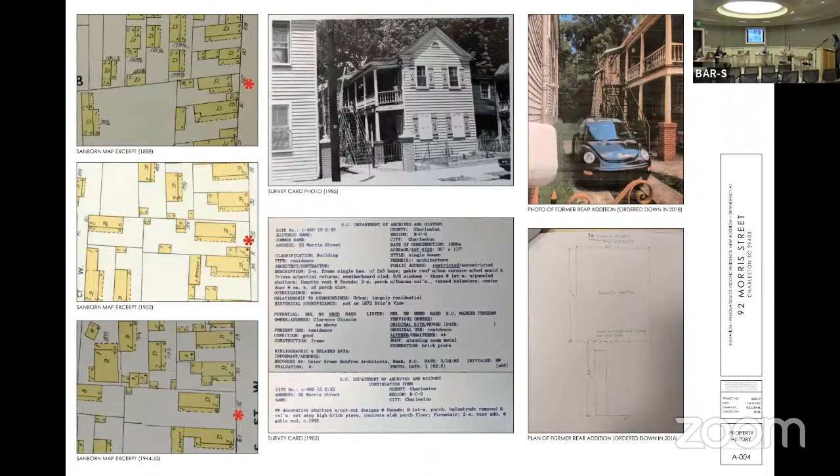Here is an existing and proposed site plan. The scope of this project includes restoring and elevating the historic house to meet the city's FFE requirement, adding a new 2-story addition via a hyphen at the rear, and constructing a pool house at the north end of the lot. There will also be substantial improvements to the landscape site — we're just indicating something conceptual here, but those plans will be submitted by the landscape architect separately for review and approval at a later time.

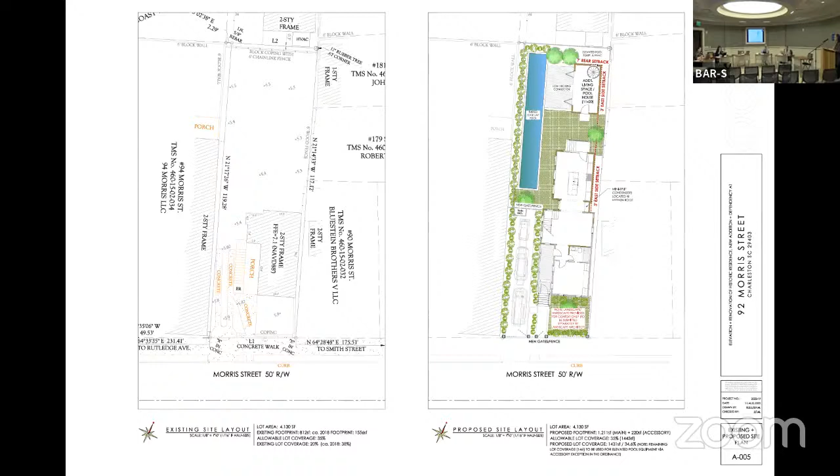Our footprint largely matches the first floor. Here again, we're restoring the existing piazza and fenestration patterns at the front and lightly connecting to the new addition at the rear.

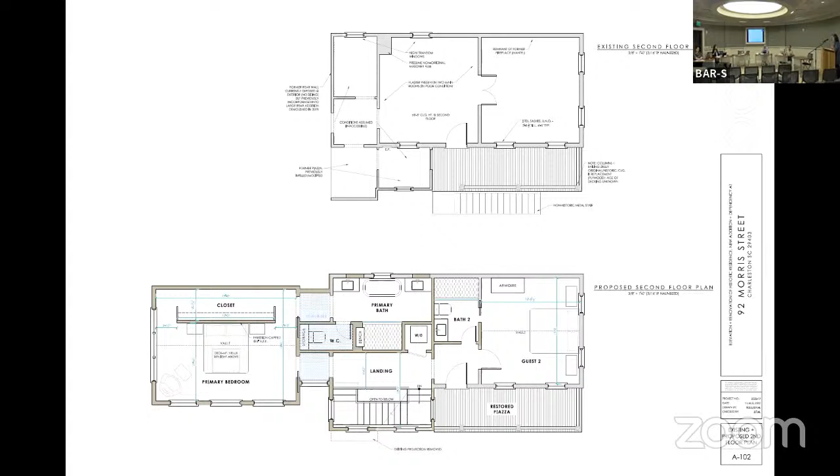Here's our existing and proposed south and west elevation. We're really just cleaning up the front mass, keeping everything pretty modest and traditional, going back with period-appropriate details, and replicating existing columns and balusters where needed.

In addition, we're proposing 2 stories of living space under a gabled roof that steps down from and sensitively connects to the historic mass via a boxy hyphen. Given the diminutive scale of the historic core and its interior spaces, it was really important to our client

that the new addition have ample opportunities for natural light and use of the rear garden. The materials and fenestration pattern there are slightly more contemporary and clearly differentiate the new from the old. We tried to be as deferential as possible by recessing the addition 3 foot 6 inches from the west elevation of the historic structure, and a full 6 feet back from everything.

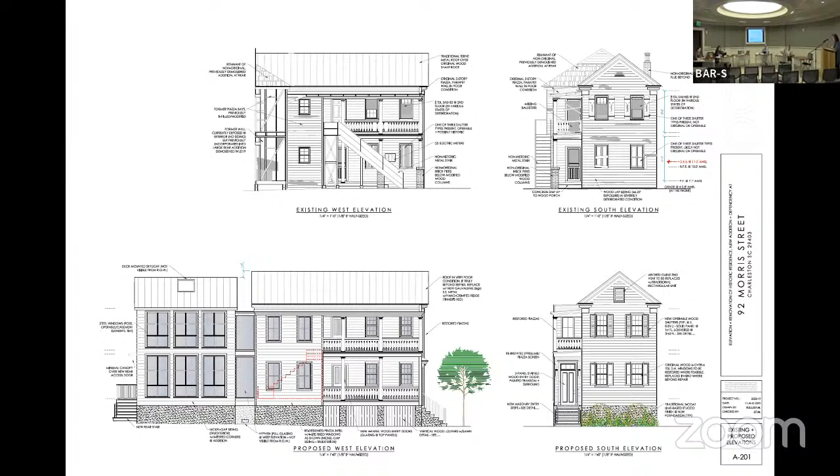The east elevation, which is minimally visible, we provided a distinct break between the old and new masses. You'll see we're also requesting to remove a non-original flue. This flue does not appear to have ever been associated with a fireplace, and given its age, condition, and lack of exterior detail, it seems impractical to try to elevate it with the house.

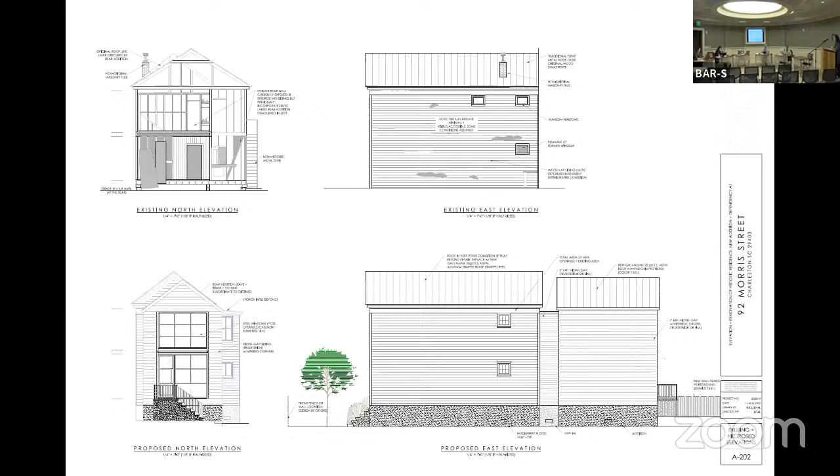The rear elevation continues that more contemporary aesthetic with board and gap siding, mitered corners, and large format fenestration, but that will be completed in the rear, not visible from the public right of way.

At the northeast front of the property, we'd like to construct a new pool house. As you may notice on the site plan, the pool is a prominent feature in the rear garden, but will not be visible. This structure will have an unconditioned first floor, and therefore it'll sit just above grade.

We're proposing to clad it in cedar shakes, and then it'll have a simple fenestration pattern that picks up on the aesthetic of the new addition.

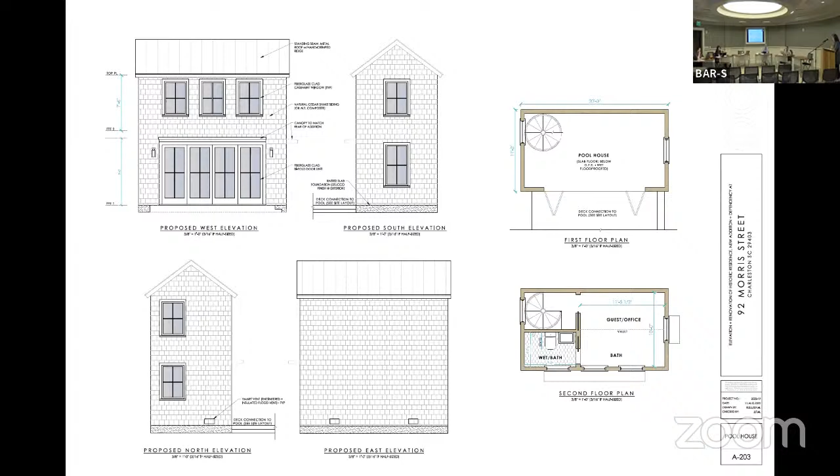Any questions for the applicant?

So the hyphen roof is pretty much a flat roof, is that right? And I see it's noted on the site plan that mini split condensers are going up on that roof. Yes. We quite push them to the middle as much as possible, so they're not visible.

And then the natural cedar, or the pool house, if it's natural? We haven't gotten that far, honestly. I'm not sure yet what direction it will go. We're sort of imagining the vision that the house will be all sort of a single color with the bronze, so it may take on a similar flavor, or it may just be natural. And if it's composite, it'll probably be a solid color.

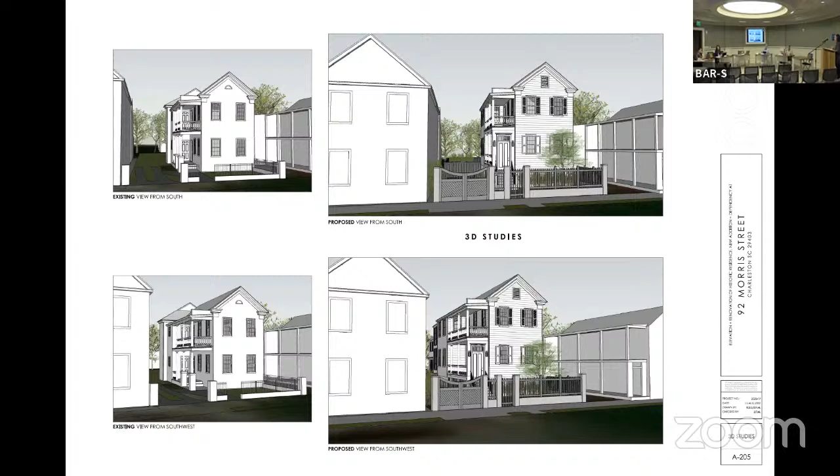Right. Your question? It was, I think that the west elevation of the addition is probably not terribly visible. Correct.

No public comment? Thank you. You'll give us city staff comments and recommendations. Staff observations: the proposed addition to the existing house is minimally visible, and we couldn't find an angle where the pool house was visible from the public right of way. Those alterations to the previous piazza enclosure help clarify what was an upward addition. The staff only had a comment for the applicant to double check their floor plans for the pool house, because it looked like there was an extra label for bath in there somewhere. But other than that, we recommend conceptual approval and final review by staff.

Conceptual approval, final review by staff, and she'll fix the notes on the floor plan. Okay, we have a motion on the floor for conceptual approval with final review by staff. Do I have a second? Second. Vote. Bill? Yay, in favor. Fillmore? Yay, in favor. Chair votes majority, and the motion passes unanimously. Thank you.